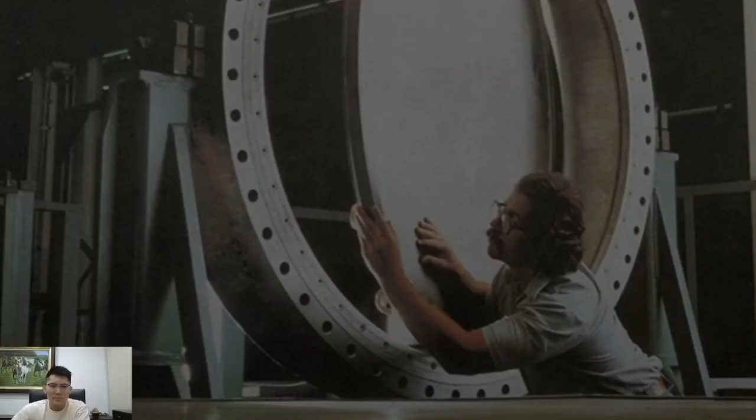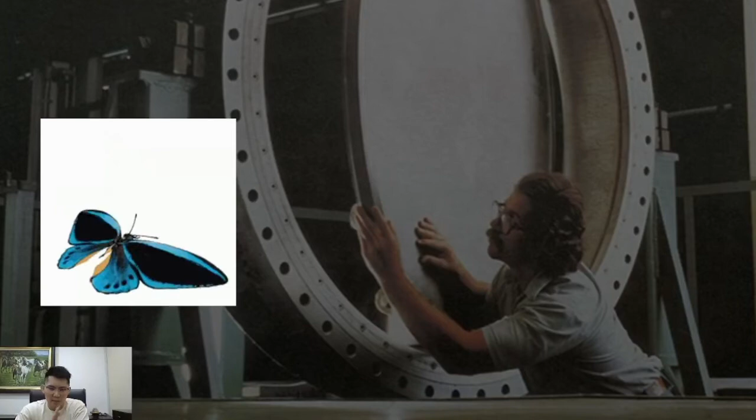Okay, so first of all, why do we call it a butterfly valve? Have you ever seen how a butterfly swings its wings? Yeah, this is a very beautiful butterfly. So it's an animation. So similarly, how a butterfly valve works is actually a quarter turn valve. So you can see this goes from close to open. So when open, the disc is actually perpendicular to the valve body. When the disc is aligned with the valve body, it's in the sealing position, or what we call the full close position.

So that's the reason: because of the motion of this quarter turn valve, this butterfly valve is very similar to butterfly wings, the motion of the butterfly swinging its wings. So we call it a butterfly valve.

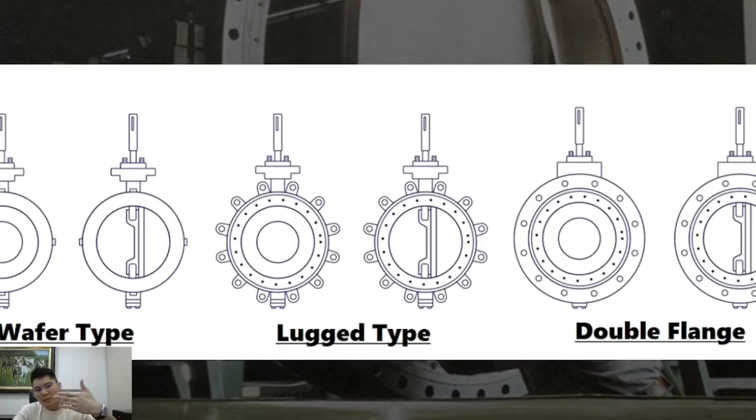For butterfly valves, we can differentiate them through a few different end connections. The first type on the leftmost is a wafer type, in the middle is a lug type, and on the right hand side this is a double flange. This is an animation view. On the left it's showing the disc fully closed, and when the disc is perpendicular it means the valve is in the full open position.

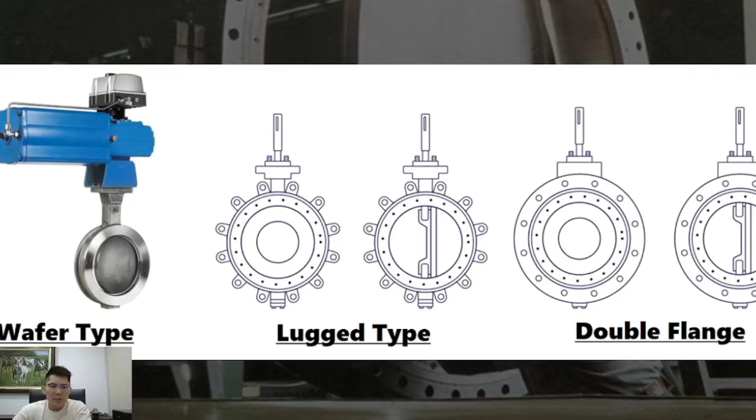So what does it look like in the actual product? So you can see this is a wafer type. This is lug type. With the lug type you can see there are like ears, and this is double flange.

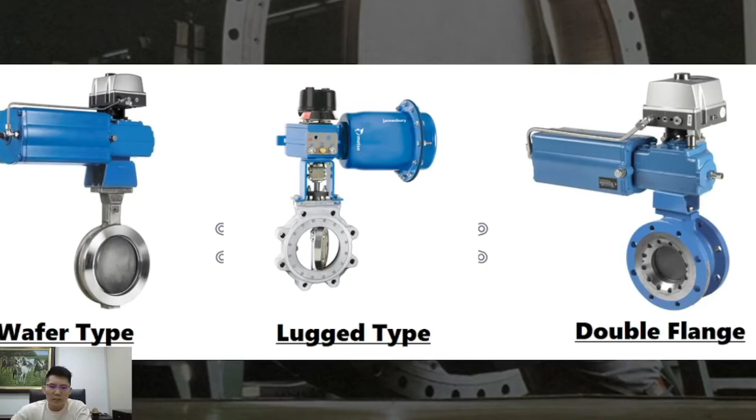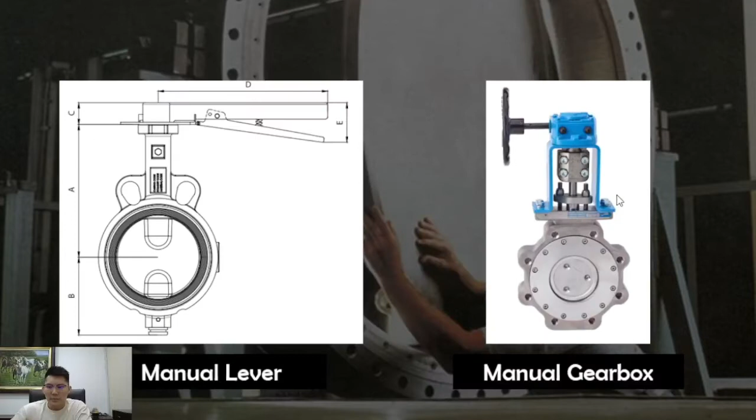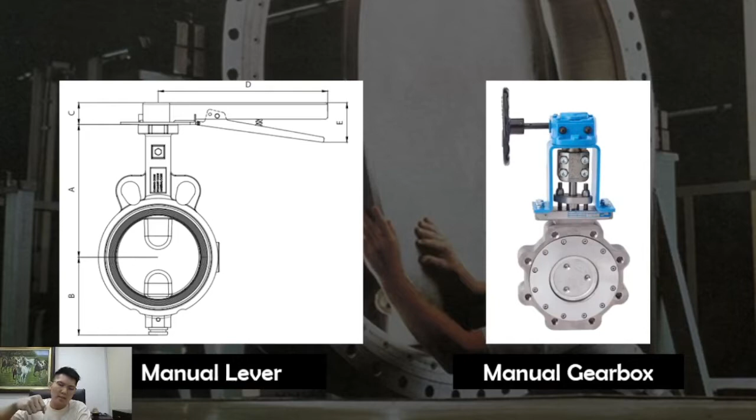Okay, here come some diagrams about how to operate a butterfly valve. Over here you can see this is a butterfly valve and this is connected to the shaft. But how are we going to rotate the valve in a quarter turn motion, meaning 90 degrees? First, we can have a manual lever. So it's a lever type. You can rotate it clockwise to close, counterclockwise to open. So in 90 degrees, or what we call again a quarter turn.

For butterfly valves with a larger size, of course, when the size is larger, the friction and the torque value required is larger. So it might be very difficult for us to operate it by using the manual lever. So we have the option of using a manual gearbox. With a gearbox hand wheel, we can rotate the valve, or what we call stroke the valve. What if we don't want to do it in a manual way? What are the other options?

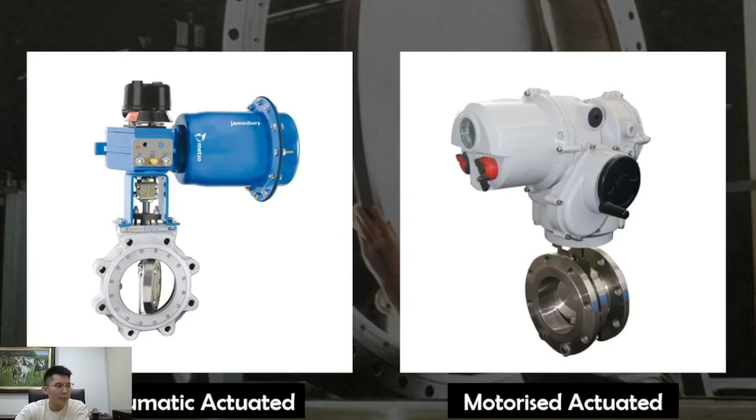Okay, here on the left you can see this is a pneumatic actuator. This is the lug end connection, or the lug type butterfly valve. It is connected to this blue component, which is the actuator, the pneumatic actuator. And on the top, this is a position monitoring device, or what we call a limit switch.

On the right hand side here, this is an example of the double flange butterfly valve, and it is controlled by an electrical actuator, or what we call a motorized actuator.

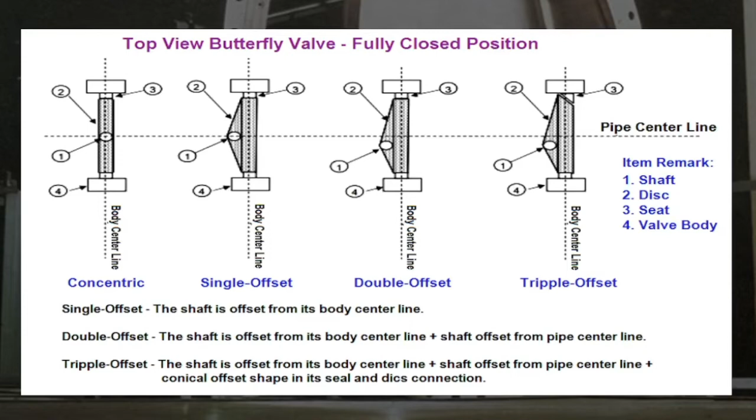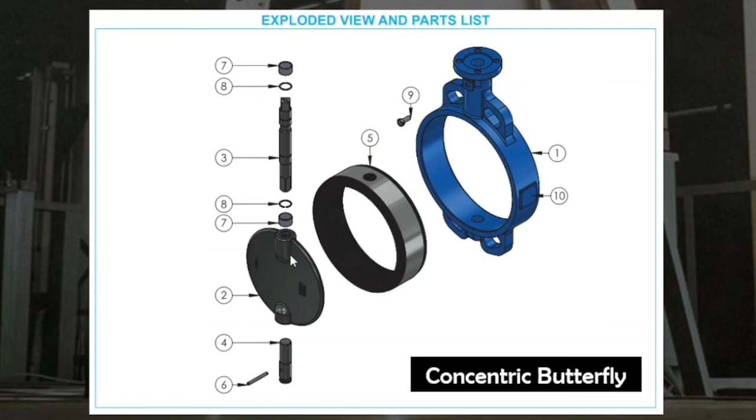Heng Chuan, I will clarify your question shortly. So this is a concentric butterfly valve. Just now when we mentioned the valve disc, you can see the shaft position is located at the center of the body, the center line of the body, and also the center line of the pipeline.

So this is how we determine or differentiate the offset of the butterfly valve. Next we go to the eccentric, or so-called single offset or single eccentric butterfly valve.

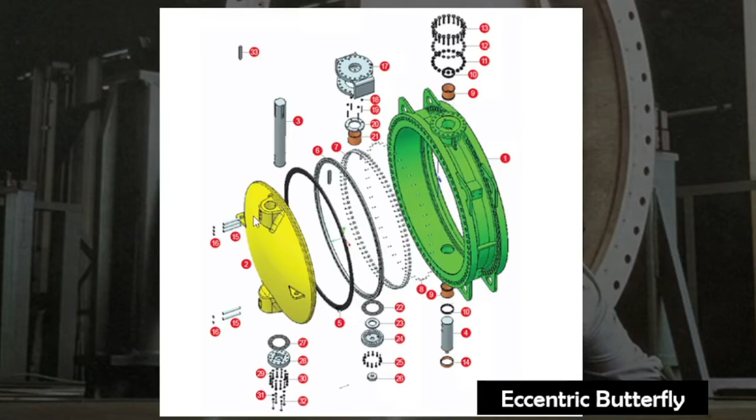So this is a butterfly disc. You can see comparing to the concentric butterfly valve, now the valve disc shaft is located offset from the body center line. Same thing for this design of valve.

Usually the seat material used is EPDM, PFA, NBR, Buna N, or FKM. For both of these designs, the application will be more like fire water or deluge valve, for seawater applications because of the seat material of EPDM or PFA rubber. So it will be suitable for seawater or water applications.

Same thing - how can we differentiate this? You look into the shaft position on the valve disc. Of course it's difficult for us to see whether it's offset from the pipe center line, but very obviously now you can see it's offset from the valve center line.

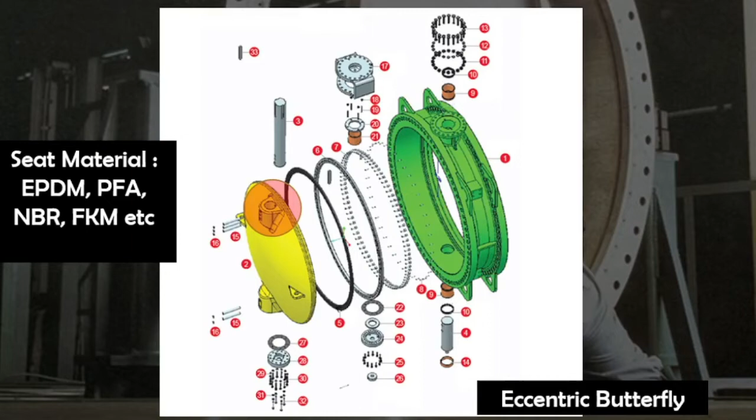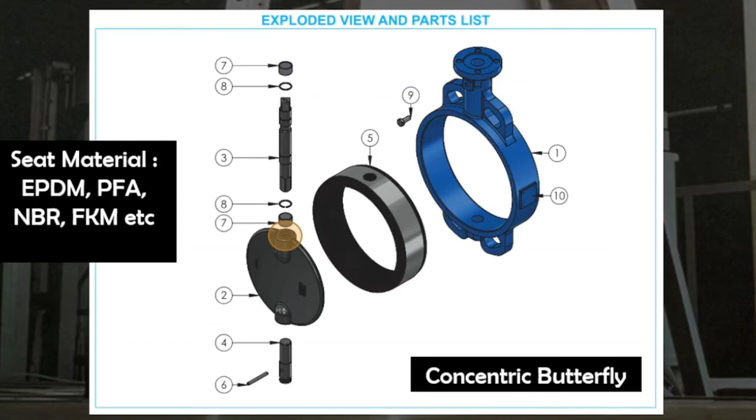So this is coming back to the question from Heng Chuan: when do we use double offset and when do we use triple offset? The first two we discussed use a soft seat, or so-called rubber lined - EPDM, PFA, NBR, nitrile buna N, or FKM. Same thing for concentric and single offset.

So now this is a double offset butterfly valve. You can see from this diagram, this is the butterfly disc. The shaft is offset from the valve center line, slightly offset from the valve center line, and here as well, this is the pipe center line.

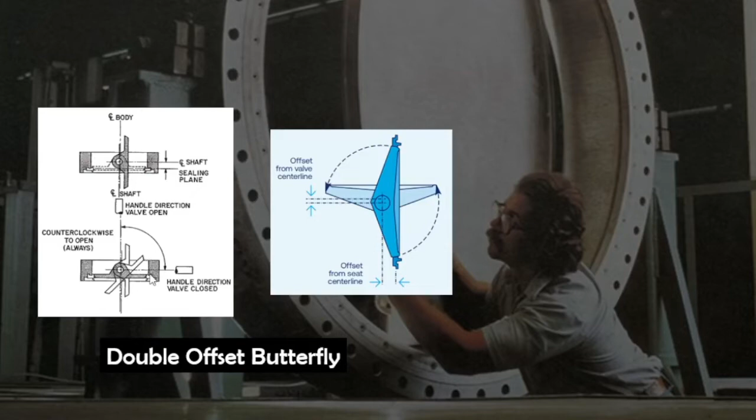This is the so-called pipe center line, and you can see it's offset from the pipe center line. This is how it's located here. This is the rotation when the valve moves from full open to full close, and in this direction of full close, this is how the disc will actually get in contact with the seat material in this location.

For this double offset butterfly valve, the seat material usually used is Teflon, PTFE, reinforced PTFE (RPTFE), modified PTFE, or Kel-F. Kel-F is usually used for cryogenic applications.

So for this double offset butterfly valve, or as people commonly call it, the high performance butterfly valve, this is because of how the improvement from this double offset helps in reducing the friction.

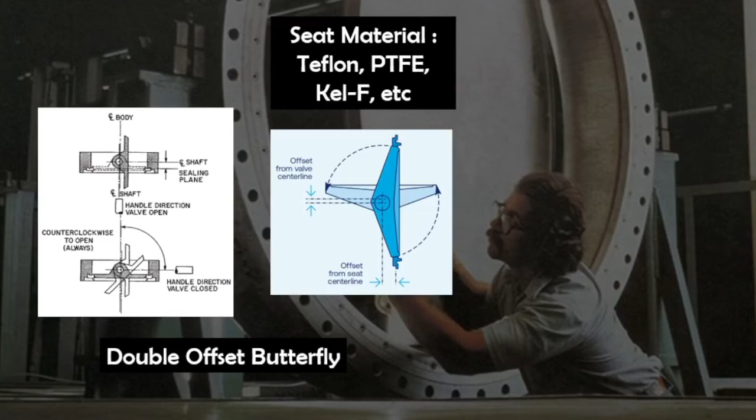Here is the explanation of the advantages of double offset butterfly valve, or so-called double eccentric. It further extends the effectiveness of seat tightness, and this rotation actually transmits a camming action to the disc, swinging it completely away from the seat, preventing jamming, and eliminating wear points around the disc at the top and bottom of the seat.

In short, I'll put two conclusions. First, it eliminates the wear point around the disc at the top and bottom positions. So when it turns and rotates, it's actually reducing wear and tear, giving you higher durability, meaning a higher life cycle and longer service life.

Secondly, by eliminating the wear points or contact points, it reduces friction and also reduces the torque value. So it reduces the size of the actuator required, or the torque required to stroke the valve.

Okay, getting back to the question from Heng Chuan: for the first three types - concentric, single offset, double offset butterfly valve - we are using soft seat material. So when do we need to use a triple offset butterfly valve?

This is one example of the triple offset butterfly valve - this is the butterfly disc. You can see number one, this is the offset from the center of the valve. This is the actual center of the valve, and now the shaft is located in this area. Secondly, from the center of the flow port, or the center of the pipe shown in gray color, it's now slightly offset from the center.

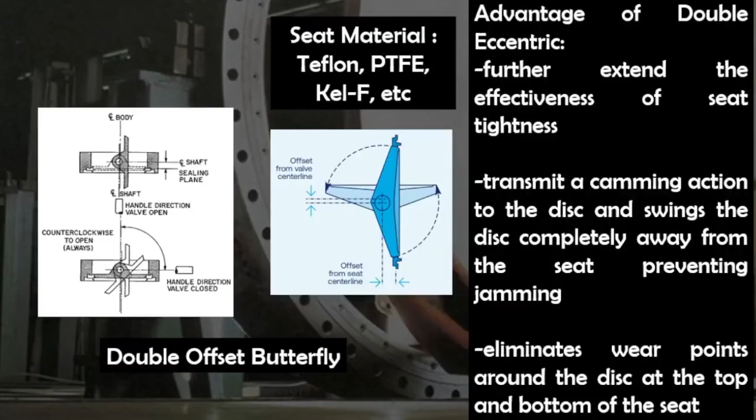Theoretically, the disc of the valve is machined to an elliptical shape - just like an oblique slice from a solid metal cone, an elliptical shape. When the valve is closed, the elliptical disc will be sitting on the major axis and will displace the seat ring outwards - the top and bottom of the valve seat will come closer to the valve disc. When the valve opens, this goes in reverse direction - it comes in, and the top and bottom move outwards. This reduces friction and wear and tear.

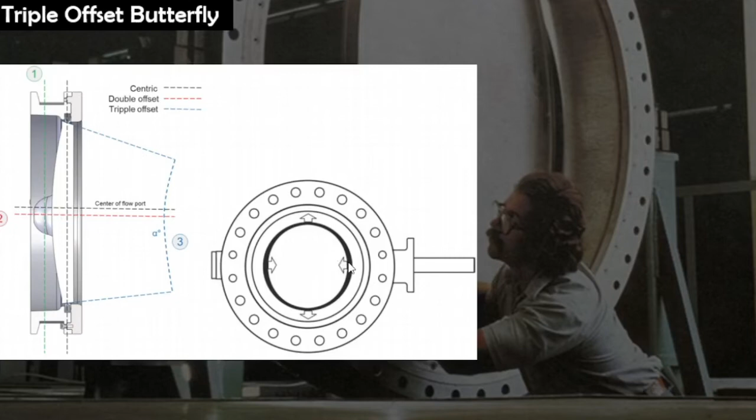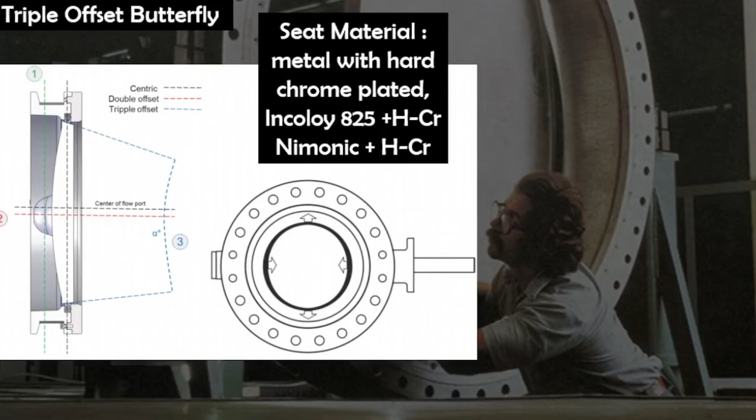So the seat material usually used is metal seat, like metal with hard chrome - for example, Incoloy 825 base material with hard chrome, or Nimonic with hard chrome, and so on. So basically, for a high performance metal seated butterfly valve, we require a triple offset configuration or design.

The advantage is it has long lasting superior seat tightness. By using this triple offset, it can achieve tight shutoff, or so-called ANSI FCI class 6. The elliptical machined shape creates lower friction and excellent wear resistance, due to the movement of the seat ring reducing wear and tear, and lower friction from reducing contact points. With this metal design, there's no resilient or soft part exposed to the medium.

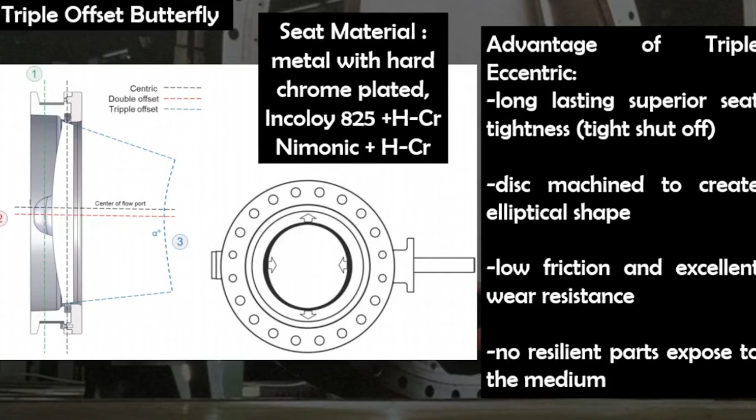Okay, let me take a look. The question is: is the higher offset the better valve performance as the wear is reduced, from Jia Chen?

Not exactly. For the first three types - concentric, single offset, and double offset - when it goes to a higher offset, yes, using soft seat, the performance is better because it reduces wear and tear. So the life cycle and service lifetime will be longer, and it also reduces friction, so the force required to operate the valve will be reduced.

Butterfly valve suitable for gas pipeline? Yes, it depends on the gas medium as well, of course, whether it's corrosive or erosive. But most of the time, no problem. We have been using a lot of these butterfly valves, for example, on hydrogen services, hydrogen gas.

Butterfly valve have any direct for install in pipeline? I didn't really catch the question. Maybe you can retype it. Hi, Justin from JC. Hi, welcome. Hi, thank you, you're welcome.

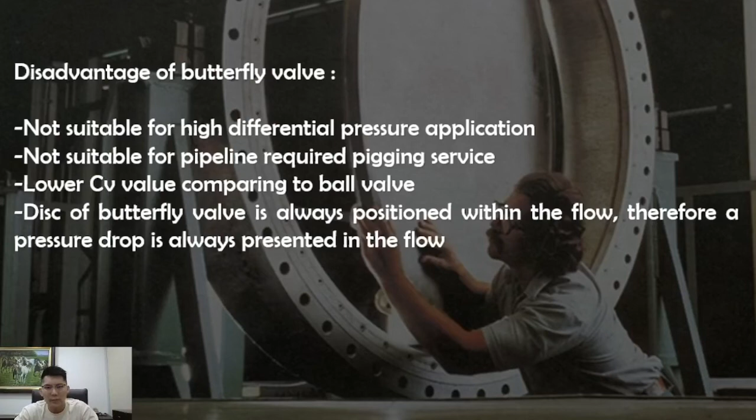So same for number 4. The disc of the butterfly valve is always positioned within the flow, therefore a pressure drop is always present in the flow. So when you are operating a butterfly valve, the pressure drop is always there and higher compared to the ball valve and gate valve.

Installation direction. Okay, Yi Xiang. Yeah, this is actually very okay. I understand where Yi Xiang is coming from. It's a very good question. I think I have put something here. Okay, yeah, this is it.

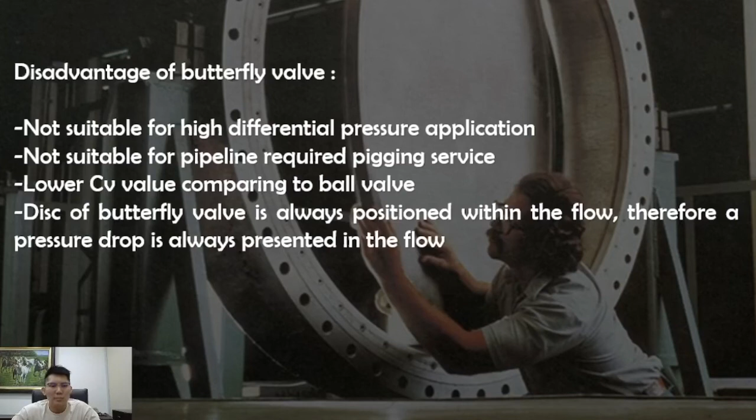So the installation direction, from Yi Xiang, actually very much depends on the design or construction of the butterfly valve, but most butterfly valves are bidirectional, meaning there's no specific installation direction for the butterfly valve.

Wide rangeability, because it can give a high CV as well, but of course, like I mentioned, it's lower than the ball valve. Wide options for various applications. It can be used in cryogenic service. If you want a fire safe design, high temperature, niche requirements, vacuum services, it is suitable to be used as well.

Good dynamic stability in both flow directions. This is referring to the comment from Yi Xiang. Most butterfly valves are suitable to be used in both flow directions, but some metal-seated butterfly valves are unidirectional.

Okay, so thank you. Yeah, let me take a look at the comments before I end the session.

In my opinion, pipe supports are always better to be in place. This can really reduce the stress applied on the pipe itself, the joints, and the valve, allowing the valve to last longer. Yeah, I do agree with Lincoln. Of course, for pipe support, we have the so-called spring hanger. It's not just a simple hanger. It can involve a lot of stress calculation as well. So yes, it's always recommended that the pipeline have a calculated pipe support.

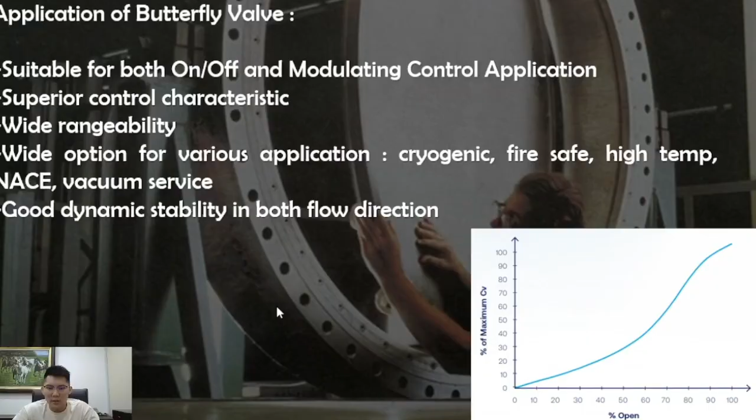Thank you, everyone. So that's my sharing for today. I tried to make it short and simple, because it's an introduction to the butterfly valve, and we talked about the applications: it is suitable to be used for both on-off and modulating control. On-off, which Roslina was asking about just now, as an isolation valve, and also as a control valve.